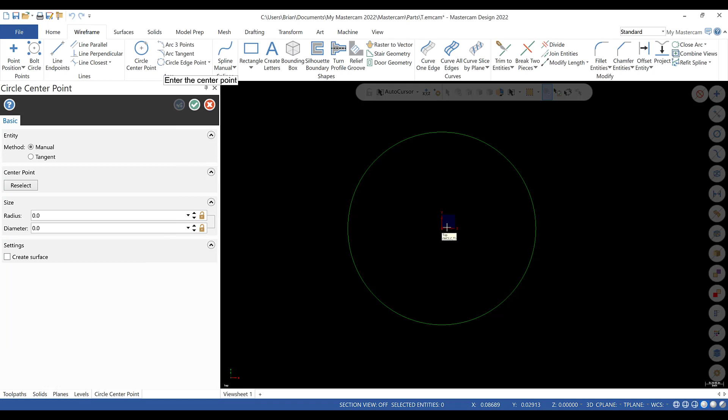All right, and there's essentially the 2D geometry we're looking at. Now it's time to go into solids and extrude this shape. This part overall is 5/8 of an inch thick, so we will change direction and change the distance to 0.625.

Okay, so looking at the drawing, next thing we'll take care of is this chamfer. Back into Mastercam, we'll do chamfer, 1 distance. It's a 1/16 chamfer, so I'm just going to pick this edge here and selection, and the distance is 0.0625. We'll hit green check. There is the basics of this model.

Okay, so for right now I'm just going to take care of the levels. This level is going to be part wireframe. Then I'm going to do a new level, and this will be model. I'll take the actual solid model and put that on level 2. All right, good time to save. I'm just going to save this on my desktop as 5-axis drilling.

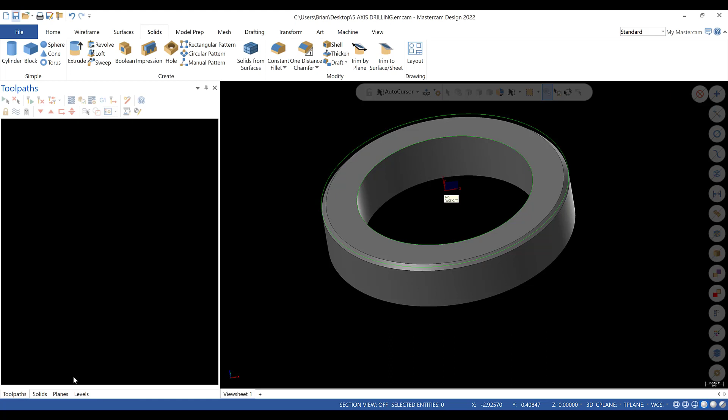All right, and what I'll do is I'll transition here, let you guys catch up, and we'll take care of these 13-degree angled holes. Okay, so let's take care of the angled holes here.

So we'll take care of a bolt hole circle at a diameter of 2 inches, 860 thousandths into wireframe, and I'm going to make sure my levels, the part wireframe, is active. I will then draw the arc, diameter of 2.86, and then hit green check.

And then what I want to do is I'm just going to draw a quick line from 0,0 out into space. The only thing I got to watch out for is that it is horizontal. It's not super fussy, but it is best. So if I go to top view here, you'll get the perpendicular icon right there, and click here.

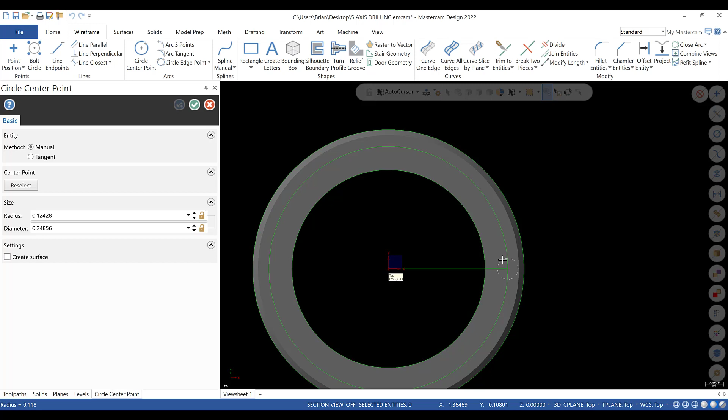And then I just hit divide to ensure that there is a nice crisp intersection where I want it. I hit circle center point, put it at the end of the line, and these are 1/8 of an inch diameter circles or holes. Then what I do is I delete this line. Now what I want to do is tip this wireframe geometry.

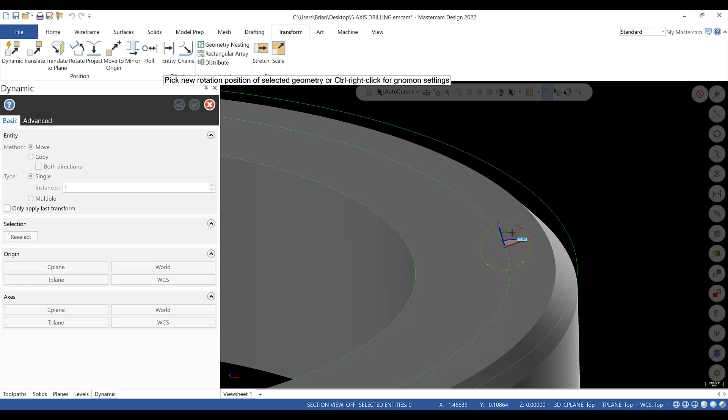So to do that, I'm going to go to transform, dynamic, select this hole, and hit end selection. Place the dynamic gnomon right in the center. About the Y, we're going to tip this -13 degrees, just like that, and we'll hit green check. So now we have a tipped piece of geometry.

All right, now I'm going to clear colors, and I'm going to rotate this arc, okay, and notice it defaulted to 3 instances, 1, 2, 3, at 90 degrees in between. That is correct, that's what we want. Copy is on, green check. Right click, clear colors, and you'll see our geometry.

Now it's time to cut the holes into the solid model. So we'll go to solids, extrude, select the 4 circles, hit green check, and we are going to end up doing a cut. We're going to go both directions to make sure it cleans up.

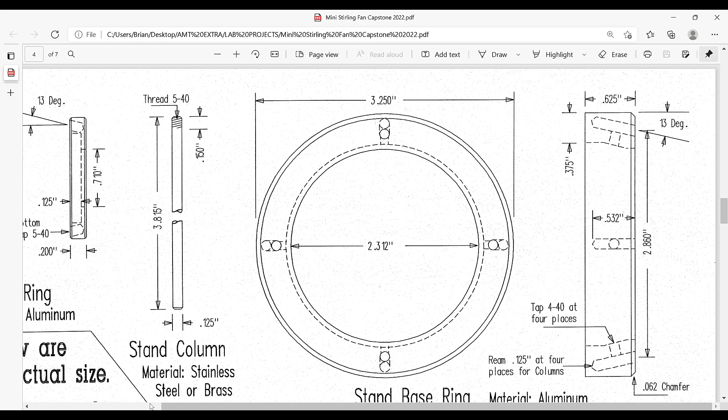And these holes, if you look at the drawing, I don't see any specs on the depth here, so we're going to go about 1/2 an inch. If we go back into Mastercam, we do a depth of 0.5, and then we go into transparent view down in the right corner of the software. We can see the holes, we'll see that we are not breaking through the edge. That should work for us without any problems.

So we'll hit green check now, and we have our angled holes. Okay, if I turn the wireframe geometry off, we'll see our workpiece. So there's the angled holes. This part, the actual workpiece, is complete.

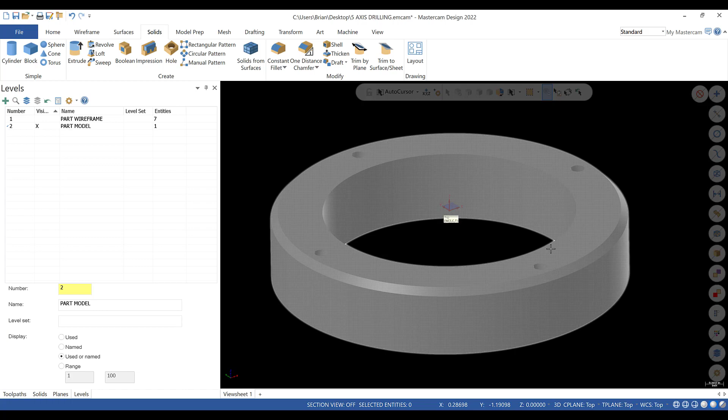I'll put a transition in here. We'll draw our stock, we'll merge in our fixturing, and then we'll start the machining process. Okay, so let's take care of our stock. If we go back into wireframe, I'm just going to turn that one off. I'll do a new level, and this will be stock, and we'll end up drawing just a circle on the top here.

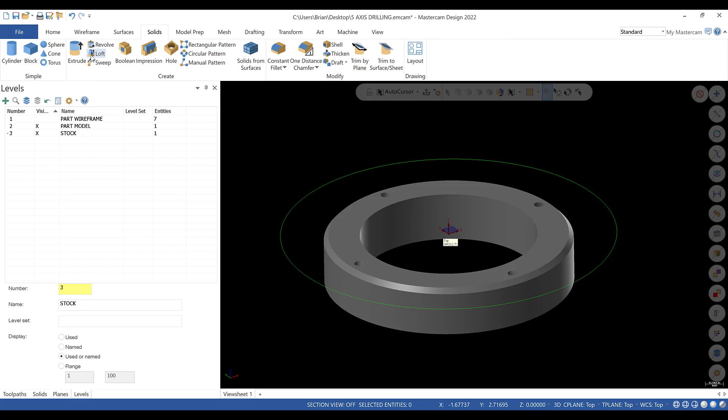And the OD, the stock we're using, is going to be 4 3/8. All right. And then we'll hit green check. And then what we'll do is we'll extrude this down. Now, this stock, we are going to be holding in a 3-jaw chuck on the UMC. The distance we're going to hang on to, the jaw step is 3/8. This workpiece is 5/8. So if we hang on to even 1/2 an inch, we'll be fine.

Make sure it's create body in one direction. So again, see how that doesn't take care of everything? We got to hang on to enough that gives us clearance away from the jaws. So even if we go 1 inch, we should be okay. But let's go 1.25. See how that looks. And then let's take a look at this in transparent. That should be enough to hang on to.

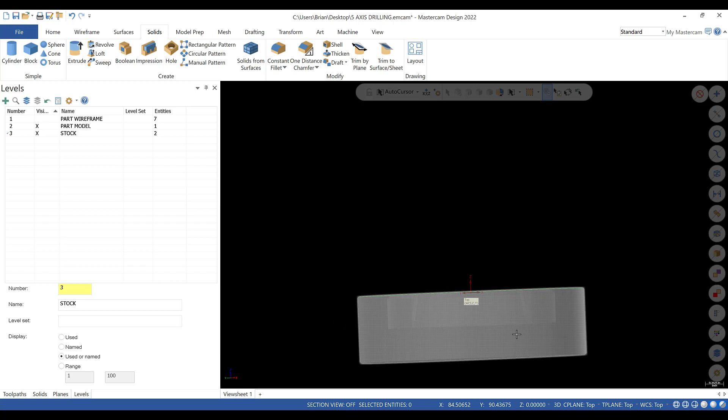Obviously we'll bring in the stock, bring in the chuck geometry. We'll merge that in right now and see how that looks. But that's what we're going to work with for now. I think that'll be fine. One thing I will do is I will highlight this, click that, and I will change the stock color to red. Okay. Good time to save.

And now what I'll do is I'll go to File, Merge. And I'm going to take a look for where I have the UMC tooling right here. There we are. Okay. So I'm going to move this somewhere here for right now. Okay. I'm just going to hit green check and clear colors and out of here.

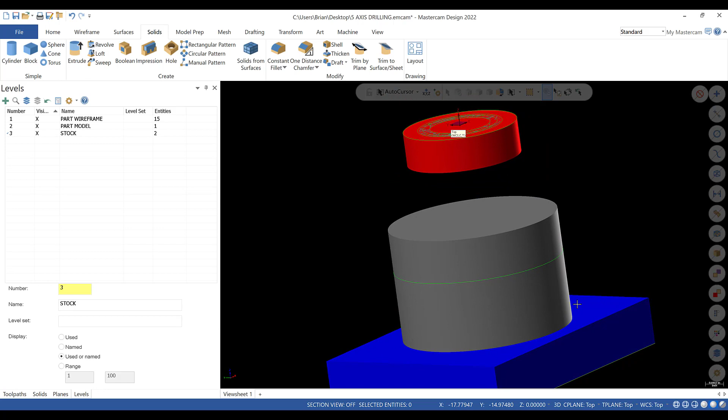So what I want to do is, this is our fixturing. Okay. This is going to be the workpiece. Now, again, I don't really draw the chuck jaws. I treat this whole thing as stay away, if that makes sense. So I know that the step I want to be on in the jaws when I flip the jaws on the UMC is roughly 3/8 deep.

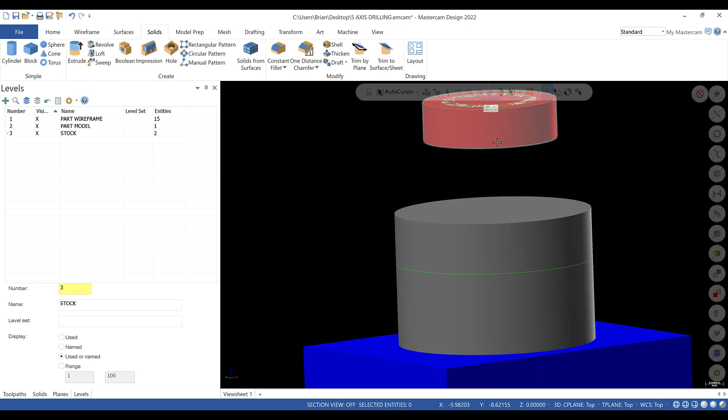So what I'm going to do is, there's a couple things here. This is the base of the chuck. Okay, we can position this down 3/8, or I can take a piece of geometry. If I go one edge only, and actually I want to make sure I'm on the right level here. This I want to move, so let's put this on a new level. This will be level 4. And this will be fixture. And make sure that level is active.

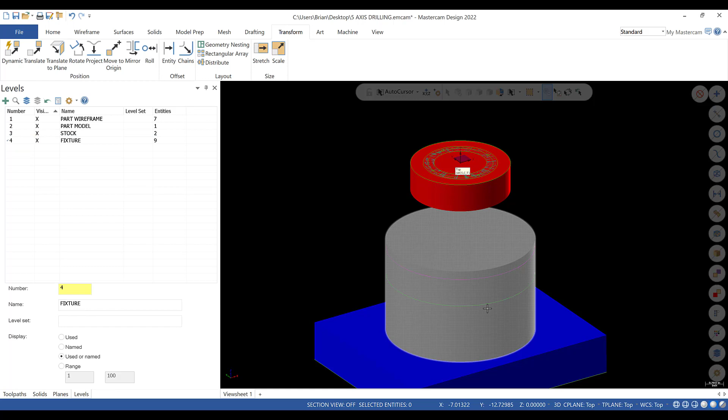And what I want to do is, I'm just going to do curve on one edge. And then I'm going to go into Transform Dynamic, select that curve, hit End Selection, center it, and bring this down minus 0.375. All right. That's good. All right, that'll help us reference this.

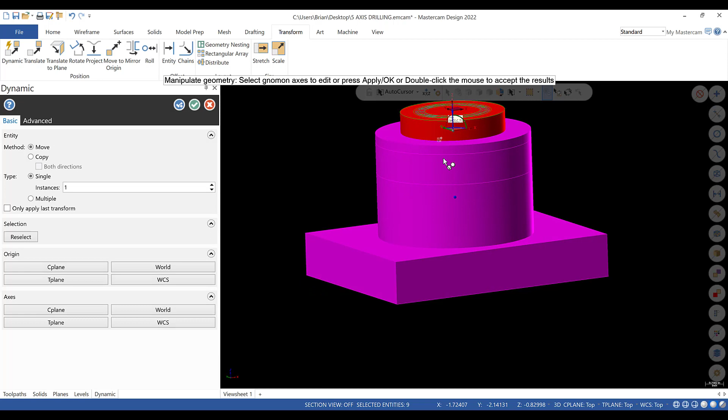Now what I want to do is, I'm going to move the fixture to the workpiece, and I'm going to go to Dynamic. You could select this arc, but I'm going to go right from the top here for right now. Bring the Z up to the bottom of this workpiece, just like that. Okay. So we know we're on the bottom. And what I usually do is, then I'll bring the Z up. Now see how it doesn't really change?

If we go to the bottom here, I just hit apply, and then reselect everything. So like, all your fixturing, hit End Selection. And I made a mistake there. You got to make sure you select everything. There's a couple options here for selection. If I just go clear colors, what I would normally do is just select everything, just being kind of careful with the window, and you should not get anything above it. It should select everything down here. And since there's no 2D geometry in the bottom of the part, we should be good to go.

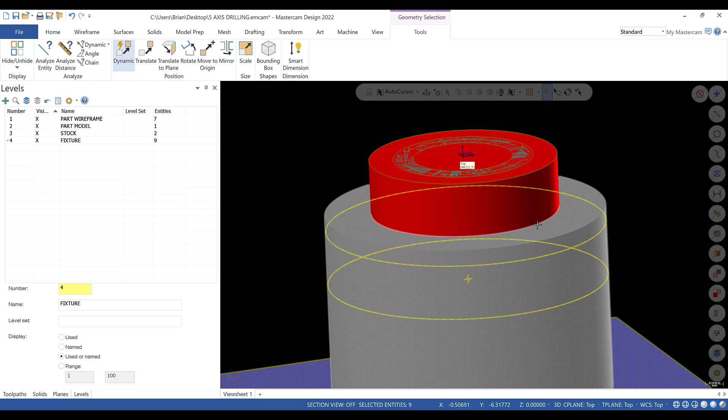Then if we go to Dynamic, select the top here, and then come up 0.375. And then hit green check. And then if we go to transparent, we should be in the front view right in line with that arc. So that'll work for us. That's a good representation of what's going on. You'll see we have plenty of room to hang on to this. Okay. That should be fine.

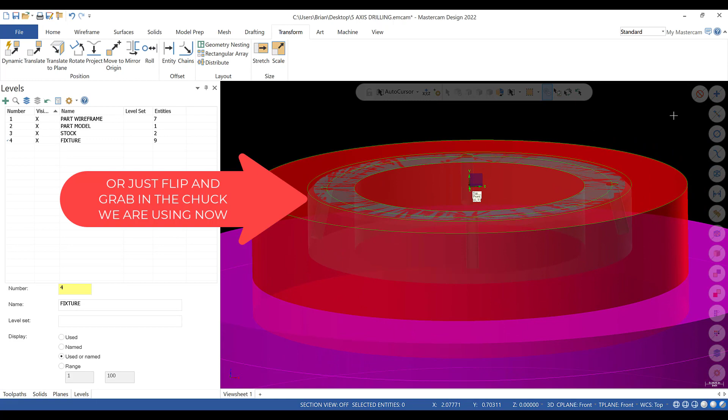The plan for this workpiece, there's a couple ways we could hang on to this to actually part it off. You can use a slitting saw. I don't think it's going to be worth it for this example. The other option is we could actually grab this in soft jaws, flip it, and mill it down. What we'll probably end up doing, just to give people more experience on the wire, is grabbing this from this side of the workpiece, maybe on the ID, or even the OD in a chuck, in a 5C indexer in the wire, and then we'll part it off that way.

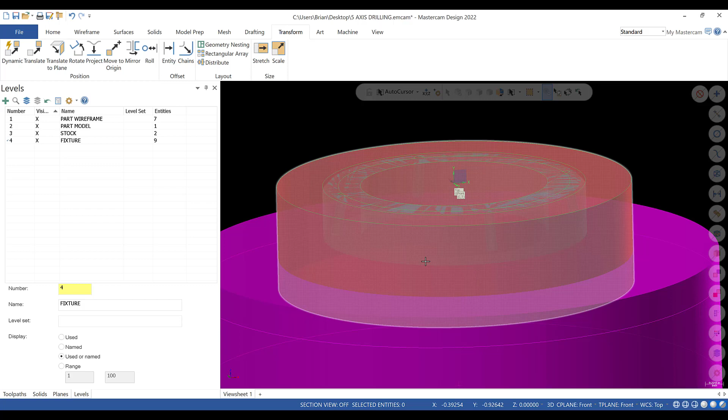That's what I'm kind of thinking we'll do there. And that's not the most efficient way. That's just to get people more experience on the wire when we get there. Plus, it runs on its own, so once this is running, you can go do something else. We only have to make 2 of these, so it's not a big deal. So we'll live with that. This is all ready to roll and position.

Good time to save. And then I gotta go back and go to planes, and I'm just gonna change these like that. Go to top view. We'll be able to use our top view for this gnomon, but I think it's easier to create a new gnomon at the top and leave the top at the bottom. I think that helps with positioning it on the machine table when getting into simulation.

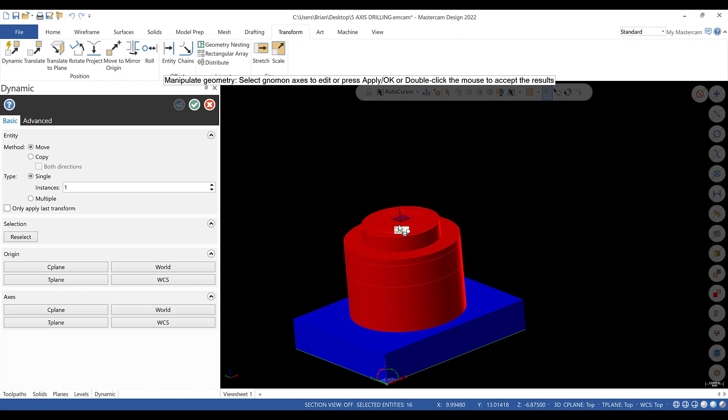So what I'm gonna end up doing is just selecting everything. And then I'm going to go to dynamic, and I'm going to select the bottom, bring it up in the Z. And see, I didn't get everything, so you got to be very careful with that. And then dynamic, select the bottom, bring it up in the Z to the gnomon. Looks good. Hit green check.

And then I'm going to do a new one. Dynamic is fine. From the center of the stock or the workpiece is fine, and this will be G54. We will make sure to manually call it 0 so it forces G54, and we'll set it as our WCS, T plane and C plane and hit green check. So there we are. Our top will be on the bottom. There it is. So now we're pretty much ready to machine this.

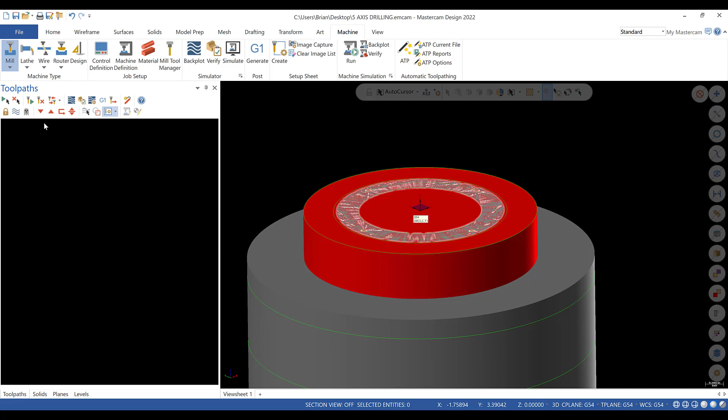I will save. I will clear colors. Okay. And I will go into toolpaths and bring up my UMC that I want to use, which is going to be the Haas UMC 750SS post right here. Okay, so good time to save and a good time to put a transition in, let you catch up, and then we'll start with the simple toolpaths, just milling this to size. We won't be doing any 5-axis work for this first operation. It's just 3-axis work.

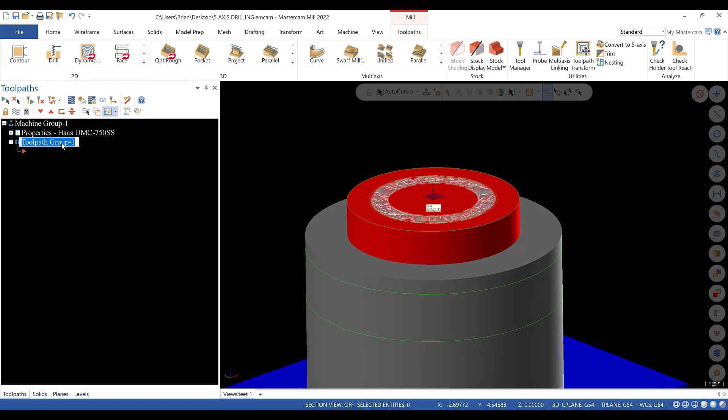Okay, so I'm going to do a stock model for this one. So this first toolpath group will be stock model. And I'll go to the stock model settings, and the initial stock shape from the stock itself. So I'll get into here, and just to be real clear with my levels, I'll turn the other options off. And select it, or just window it. Usually click 3 times or you can window it. And then end selection. And that's good.

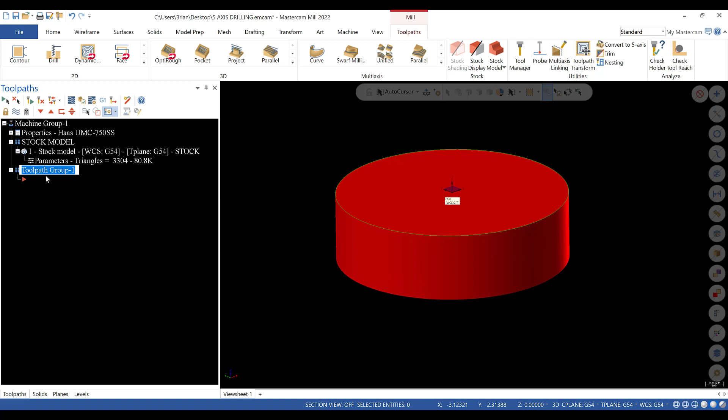There are no source operations. Everything here is fine. The color's fine. This will be stock. And the stock plane, let's go to top and hit green check. And it should look just like what we have. So that's good. So I'm going to turn that one off. And we'll do a new toolpath group now. And this will be operation 1. And let's take care of roughing this out.

So I'm going to turn the fixture back on and the part model on for this. We could use this 2D geometry if we want to. So in toolpaths, let's do a dynamic toolpath. And the machining region is going to be here. And we're going to go from outside, and the avoidance region is going to be this outside. And hit green check. I'm going to preview the chains. Looks good. Okay. One thing I will do is go transparent.

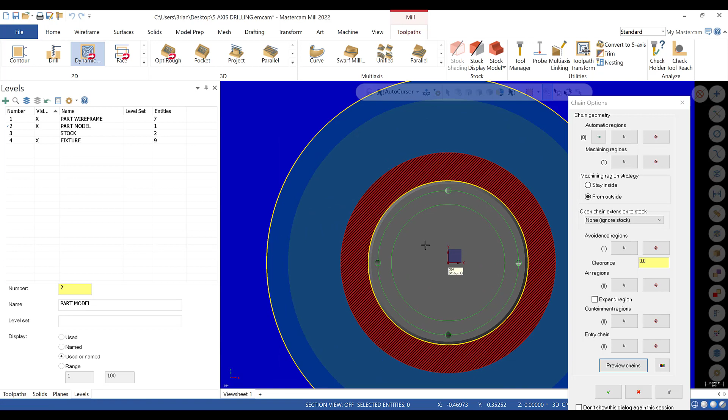And actually what I'll do here also is go to levels. And I want to turn the stock off just to make sure that lines up. And we are seeing the chamfer, but I just want to go to top view now and double check that. Looks good. So we'll hit green check. And the tool we'll use can be a 1/2-inch end mill. So go to here, go to the filter, and we'll just select a 1/2-inch end mill. That's fine. This will be tool 1 for us.

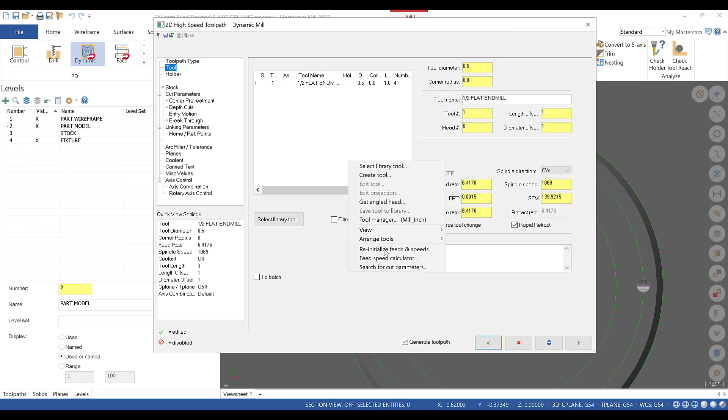This tool, I'll double check the settings here, finalize properties. This will be a carbide cutter. We'll hit finish, reinitialize the speeds and feeds. One thing I need to double check here, I'll just green check that out. Get into properties and go into tool settings, and I'm going to go from material, and this material is going to be 6061 aluminum from the mill library. That's fine. If we edit this, again, it's on the slow side, like I say in every one of my videos, but we're okay for right now. We'll hit green check. That'll get us in the ballpark.

Go to parameters again, reinitialize. This should update. That's still super slow. I'm going to turn RCTF on for this. I'm going to end up going to a surface footage of around 800. And then a chip load of this cutter of 0.003. And that's still conservative, but that's in the right direction of what we want to do. This will be roughing OD.

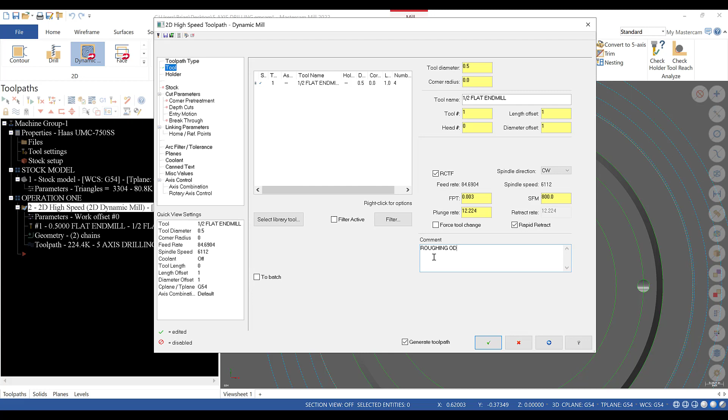And the holder I'm not worried about for this op, so we'll ignore that. The cut parameters, we'll go to a step over. 25% is fine. We'll leave 5,000 on the walls and nothing on the floors. The back feed rate will be 500. Everything else there is probably okay. No depth of cuts. Entry motion is going to be plunge only.

Linking parameters. Now, I want to be incremental for all of this. And the clearance be 2.0. Everything else is okay. The depth, this should be 5/8. But I'm going to go a little deeper than that into the stock. We should be able to stay away. Again, remember the stock is hanging up a little bit. So let's go like 750. And I'm going to regenerate that. And again, we are still above, but we're not hitting the jaw, so that'll work out.

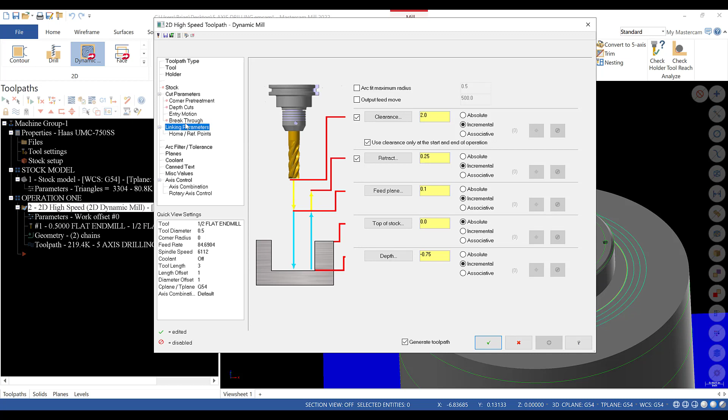Let's see what else we have here for some settings. The arc filtering, I'll turn the line arc filtering on. I'll change the tolerance to 3,000ths and split it. That's good there with apply. Planes are fine. Coolant will be on. What else we have here? Should be good. 25% should be fine at those speeds and feeds. That should be okay. Again, this is slow.

Usually when I'm dynamic milling aluminum, I'm around 12,000 RPM. The feed rate's usually in the 125, 150 inches per minute range. But again, for learning, I like to keep this on the reduced side, just in case you make a programming error. But everything else should be okay, so we'll hit green check. And I'm going to end up putting the stock model on here just to see this. And we can run this now. And we can see what we have going on.

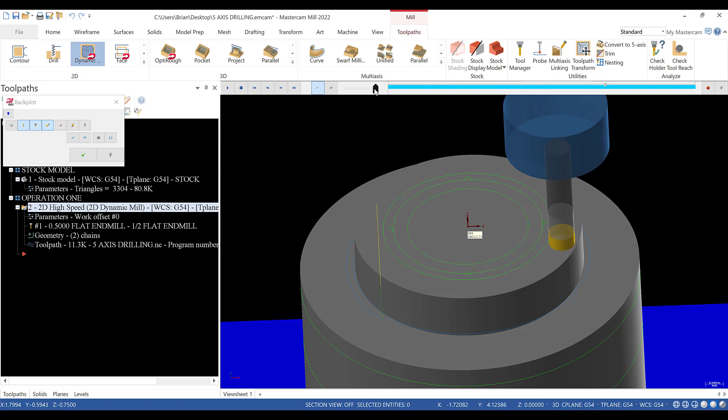Okay, pretty clean to rough that out. Actually we'll rename this now, roughing OD. Okay, and I'll separate this a little bit. So we're good with that one. Let's do a new one. So let's just copy and paste here. And this operation here will be roughing the ID. And we need to change some things in this. One of the big ones you got to change is make sure we helix in. But let's change our chaining dialogues here. The machining region, we'll get rid of the avoidance. The machining region is going to be this ID. That's all we need there. This is stay inside, and preview chains.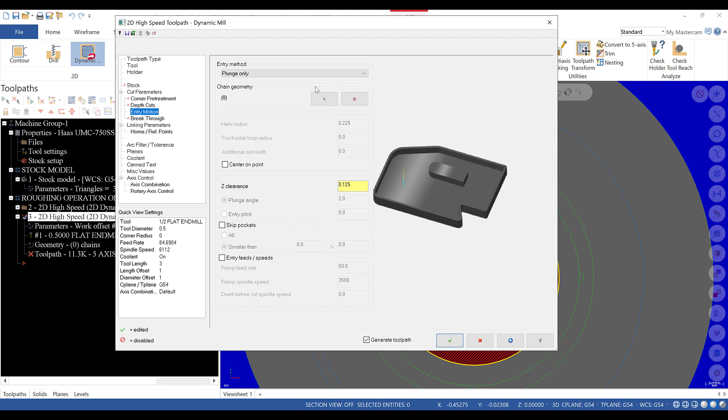We go to top view. Looks good. So the tool is fine. All the speeds and feeds are okay. The cut parameters should be okay. Entry motion will go to helix only. Linking parameters is going to be the same. Arc filtering, make sure output 3D arc entry motion is on. That'll help smooth it up. Planes, everything else is okay. We'll hit green check. Okay, let's turn our stock model off here quickly. We'll see our toolpath looks good.

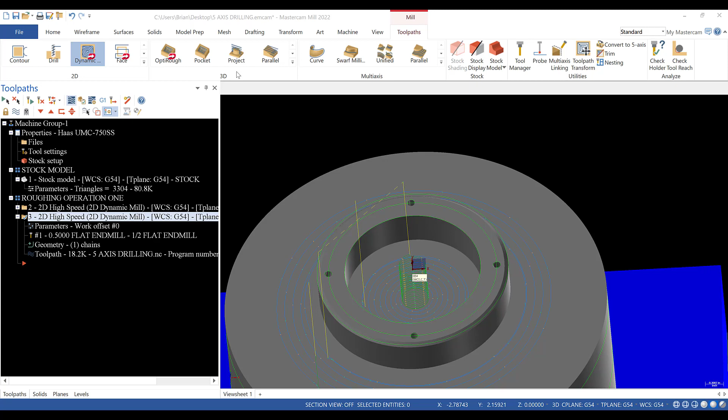Okay, so if we go to backplot and only backplot that operation we just created, we'll helix in and rip around. Okay, now you can tweak the helix settings. Let's say you want to slow down to helix in. Entry speeds and feeds, you can reduce this. So, that's up to you. I think you'll be okay. Again, we are not running that fast.

So if you do run into some chatter issues, instead of changing it up there, especially in like stainless or something, I will use these, and I usually reduce like 50%. Let it work its way in. I'll put a little dwell on depending on how quickly the spindle needs to spool up to make sure the spindle's at full RPM before it starts moving. But that's optional. I think you'll be okay. The plunge angle at 2 degrees is probably okay, but we'll change to 1 just to be safe. Z clearance 1/8 of an inch is fine. Everything else is okay, so we'll hit green check, and we'll consider that done. Okay. And good time to save.

So after this, I'll transition now. We'll take care of our finishing. So right now, I'll just reinitialize our stock model while we're at it. I'll right click, new toolpath group, and this will be finishing operation 1. Okay. And one thing I did forget, I will put a facing operation in. You don't need to see that. I'll probably do that first. I'll put it right here. I'll do a quick facing operation just to face to 0.

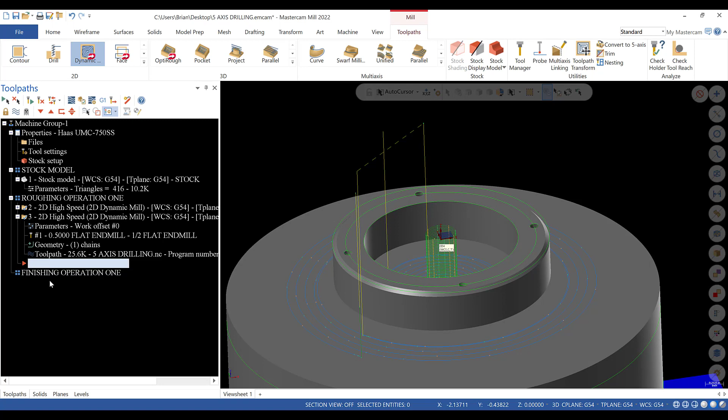And that's not a big deal. You should be able to do that by now. So I'll put a face to 0 in here. I'll come back. We'll do the contour toolpath together, and then we'll take care of the 5-axis work on this workpiece. We'll chamfer it last. We'll do a model chamfer on the inside, and that'll be it for this video.

I'll take care of the parting off. You should be able to do it. Again, I'll leave that up to you how you want to do that. So I'm sure by now you'll be able to program that. So I'll transition here, and we'll continue.

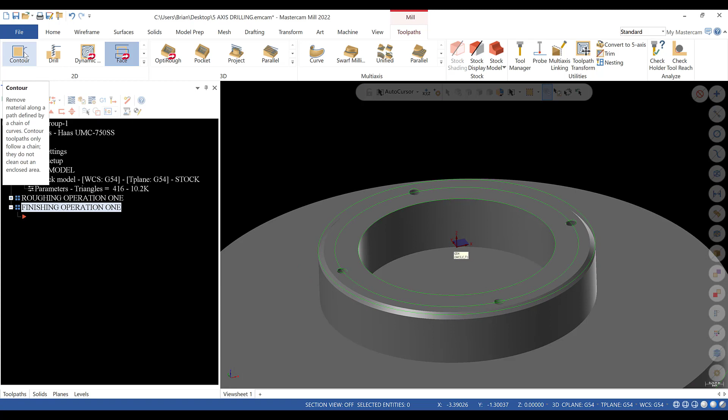All right, you can see I added the facing operation here quickly. So we're done with the roughing for now. What I need to do is get into some finish operations. So I am going to get into my planes, and I'm going to end up turning levels, and turn my stock off. I just want to be able to comp these sides and get a nice finish on them. So go to contour, and I'm going to select the outside.

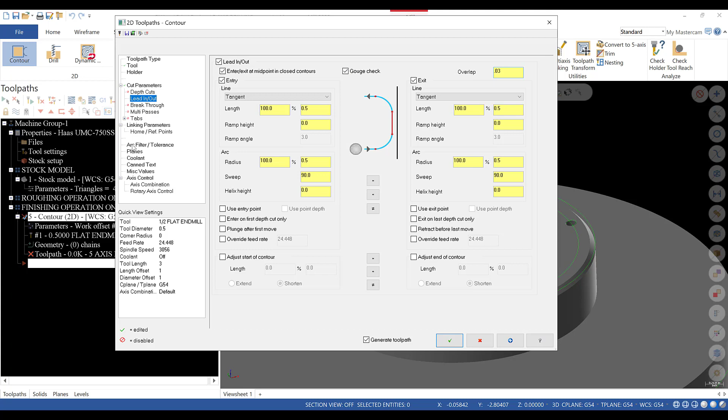And tool, we'll use the same tool, I'm not worried about it. Surface footage, feed rate's fine. Comment, finish OD. Cut parameters, wear compensation, no depth of cuts, lead in, lead out. We will make sure there's an overlap of like 30 thousandths. Linking parameters, the depth will be down there, and actually it's going to be minus 750. Everything else incremental. Make sure you put the clearance on and hit green check. And there's our finish pass.

We'll copy and paste this, and then what we'll do is we'll update the chain. So we'll rechain all. We'll select this chain and hit green check. And we generate the op, and that should work out just fine for us. I will rename this finish ID. Okay. So that's good.

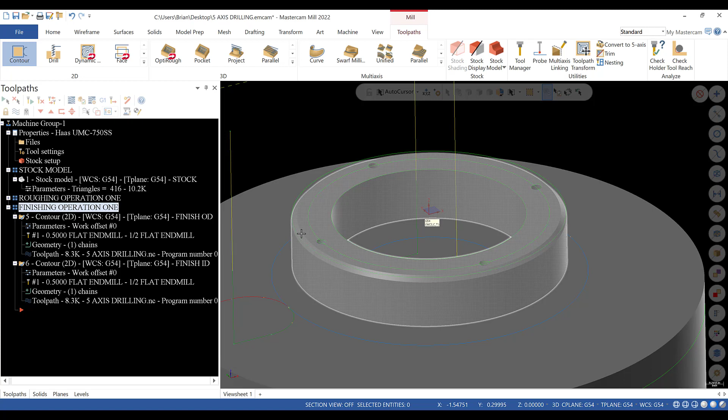And now it's probably not a bad time. I know I said I'd do the chamfers last. Let's just get it out of the way now. This one is a 16th chamfer, and I do have 1/8 inch chamfer mills in the shop. So we'll use that cutter. It may not be a full 16th because I don't want it to gouge, but that's what we're going to use. This is just for cosmetics, so we'll put it in there. Let's right click and do groups, new toolpath group, and this will be chamfer / deburr.

Okay. All right, let's take care of this chamfer toolpath. It's not a model chamfer, but we'll take this upper contour, right click, copy, and paste it because the chain geometry is going to be very similar. I'm going to get back into here. I should have a tool loaded, but if not, it's just going to be whatever tool you created, your 1/8 inch mill drill. I know it's not going to be able to create the 16th chamfer, but that's the chamfer tool we're going to use because I know I have a lot of them in the shop. So we'll leave that there.

Speeds and feeds are okay. We might have to reduce that a little bit. Surface footage is going to be like 800. And we'll reduce that because the machines don't have that. So let's go maybe 500. No, still not. Let's see here. Yeah, that'll work. I didn't reinitialize. That's my fault. And we'll do a thou chip load. That'll be good for this small cutter.

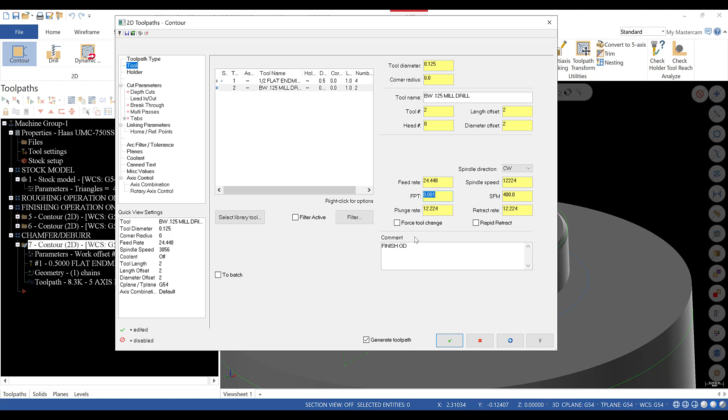So we'll hit apply. In the cut parameters, wear is fine, but we're going to go to a 2D chamfer. The chamfer width we're going to select is 40 thousandths. The bottom offset will be roughly 10 thousandths. Okay, and that'll give us a decent chamfer. We can even go like 45. It should be okay. Lead in and lead out's fine.

Linking parameters, the depth we need to change. That really needs to be incremental. So if we just go there, it should be fine. Everything else should be okay. We'll hit green check and take a look at what we got.

So this is not going to actually touch the workpiece. So even in backplot, if we single block through this, you'll see that we are away here, which is fine, but we are doing much less of a chamfer. But that's okay because I'm not really worried about it. I just want to make sure that we actually have chamfer mills available. So that's good for this one.

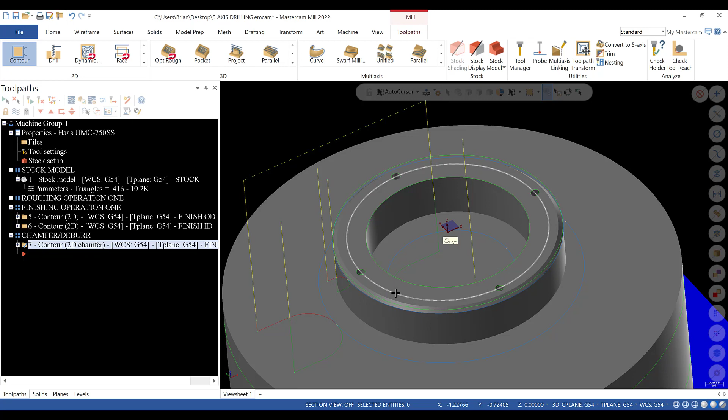The next one we need to do is model chamfer, and that's just going to deburr this inside. Okay, so to do that, we'll go into here and we'll go to model chamfer. I'm going to check this chain here, and the tool will be our mill drill. We're taking a very light cut on this, so that is going to be okay. I will cut the feed down, but that'll be okay.

Cut parameters, we'll do computer comp, that's fine. The chamfer width would be like 15 thousandths. The bottom offset will still be 10. Depth of cuts, no. Lead in, lead out, I do want to overlap a little bit.

Everything else is okay. Clearance will go 2.0. So we should be in good shape. We'll hit green check. And there's our model chamfer. All right, so it's a good time to save. And that's the end of Operation 1.

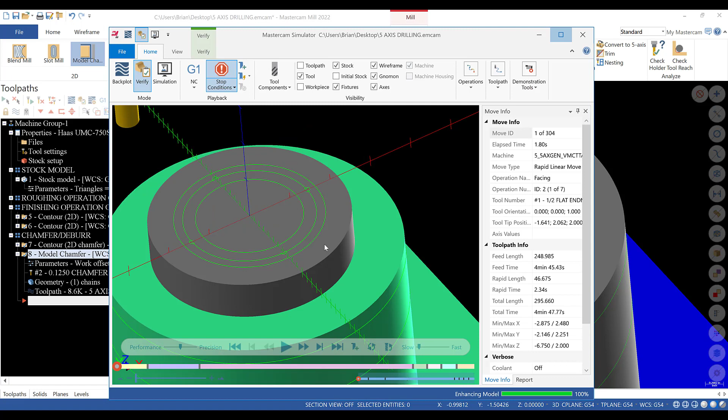So go into your simulator settings, make sure everything's set up. And then I'm going to select everything and go into verify. And let's watch this run. I got the performance precision kind of in the middle. Slowed it right down. You'll see the facing operation. And we'll take care of the OD.

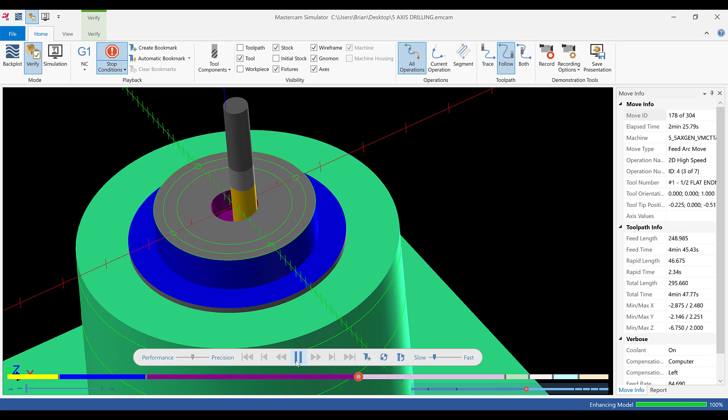Take care of the ID. And we'll finish everything up. And then we'll take care of our outside chamfer. Looks okay. Take care of the slight inside chamfer for deburring purposes. Looks good. That's the end of the operation. Again, good time to save.

All right. And we'll put a transition here. I'll just do right click right now, do a new toolpath group. And this will be holes 5x. Okay. So I'll turn these operations off. We'll go into hole 5x and we'll take care of drilling these 4 holes, tilting the B and C around. Okay, so let's drill these holes.

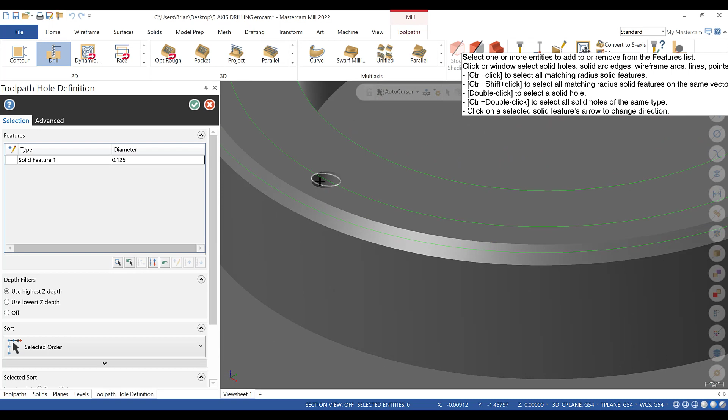We'll go to drill. And I'm going to select the surfaces of the holes. That is very important because that gives you the vector direction, which will help align the B and C axes for this toolpath. So make sure you select the surfaces. And then hit green check. Now, we're going to spot face this, spot drill it, and ream it. Just for some practice. So we'll go to tool.

We'll select an 1/8 inch tool. Speeds and feeds are fine for this. This will be spot drill. Okay. And no holder information is necessary to me for this operation because we're not tipping that much. Again, I'll leave it up to you what holder you pick. If you're worried about collisions, then you should put a holder in, but I'm not worried about it for this one. So we'll go to spot drills, fine.

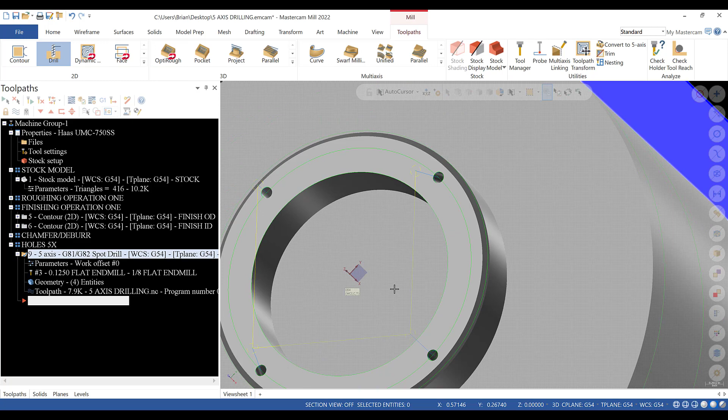Tool axis control is where it starts changing. This will be 5-axis. No hole segments, linking parameters. We need to update this a little bit. I'm going to put calculate depth from top of line hole. The depth will be minus 0.015. No tip comp on. Everything else is okay. We'll talk about safety zone in a minute. So we'll hit green check. And hopefully the tool is not going that deep. It is not. It looks good. So you see that they are tipped.

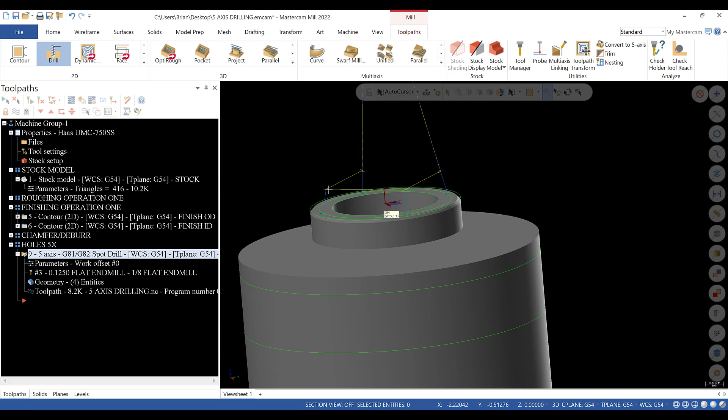Okay. Now, we have an issue here in the fact that we need to put in linking parameters our clearance of, let's say, 2 inches and hit green check. And that helps, but still rotation is occurring with the tool right here. That is probably okay for this low angle, but I want to show you how to get it like a safe zone. So we'll go to safety zone, turn it on, and we'll define the shape by using our workpiece and selection. We'll just go to cylindrical now. We didn't have to select the workpiece. That just helps center it.

We'll go to Z. And what I want to do is I'm going to increase this to something that looks okay. So that's a pretty decent clearance. So we'll go right around here. And then I'm going to offset up the zone to something like that. So this will give us a clearance zone that the tool can't go between rotations. So we'll hit green check and then hit green check again. And you'll see what happens. The rotations happen up here. So when we watch this run, it drills, goes up, moves.

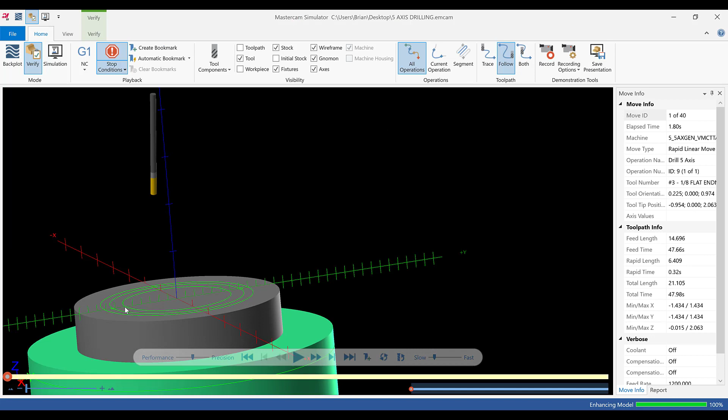Now, that's not a great representation. What we really should do is go just into verify quickly. And if you watch this run in simulation, I know the tool's up in the air. I know I got to pick a different machine, but let's just watch this for right now. So it drills, goes up, then rotates. Okay? And that's the whole point of the safety zone.

I don't think we need tool holder information, I'm not worried about it for this one. And that's the name of the game there.

Before I get back in there, I'll update my simulation settings to the Haas UMC 750. I'm not worried about the transform here. Let's verify that again in Simulate and see if it's positioned correctly. It's not, it's probably 2 inches up in the air, so I'll change that in a minute.

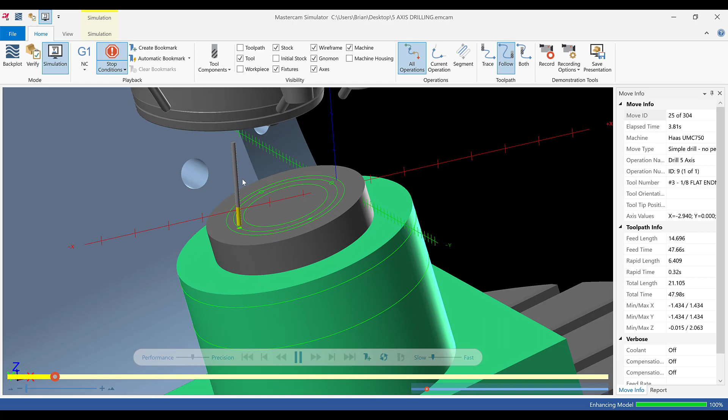We can watch this run and you'll see what I'm talking about, up in the air. You want that away during B and C movements. Is it really critical? Yes and no, but I think it'll give you more confidence at the machine. This is not a steep angle, so you could get away with it, but let's just leave it there for now.

All right, good time to save. We're going to be copy and pasting this operation a lot. The only thing that's going to be changing is the depths. So let's copy and paste this.

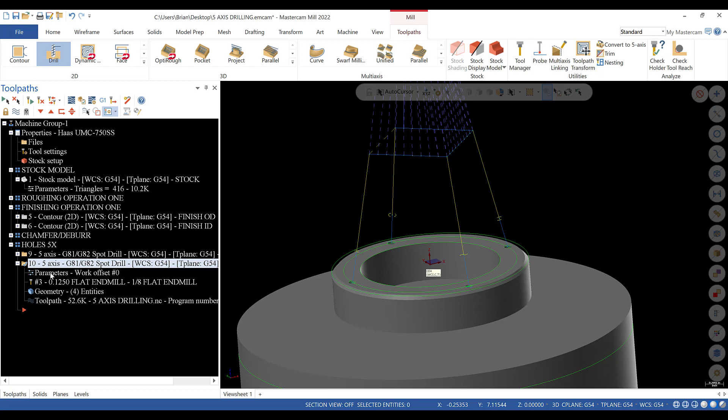Now what we're going to end up doing is taking care of the parameters, tool. Let's go to select library tool, and let's go to filter. And I'm going to go to a spot drill.

Let's say 1/8 of an inch diameter is probably okay. We got to see what we have in the shop. You might end up having to use a center drill for this, just keep that in mind. We'll just use an 1/8 inch spot drill. I'm pretty sure you could go to center drills.

Let's see where we're at in here. If it doesn't come up, it's not a big deal. I forget in here if there are center drills. Right there, radius mill, I lied to you. Nope, so we'll use a spot drill, 1/8 of an inch.

Even if you use, I forget what the number center drill would have, an 1/8 inch shank, that would be equivalent. Because again, you're not going down to the 60 degree included, you're just using the 118 at the tip of the center drill. So just hit green check, and it depends on what's in the shop.

Hit green check. Where to go? That's my fault, I got too random clicking here. There it is, this will be tool 4 for us. Speeds and feeds are okay.

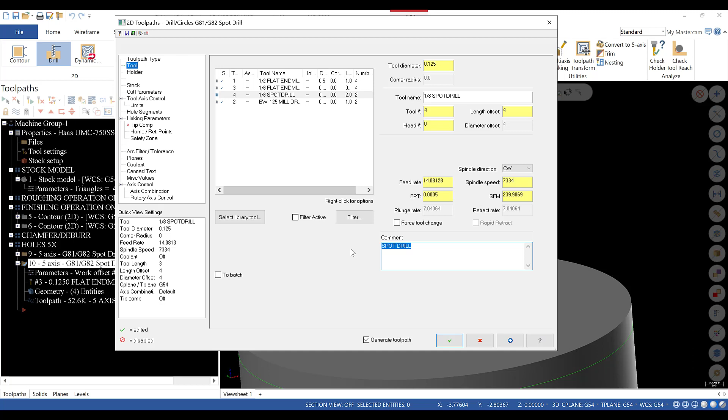This is a drilling operation. That's fine for us. This will be, so the spot drill, yeah, spot drill's fine. I do have to double check, I forget what I named the first one here, but this will work for us.

Cut parameters, this is spot drill again. Tool axis control, 5-axis, everything's gonna be the same except for the linking parameters. It went 30 for the depth. We'll go 40 for this one and hit green check.

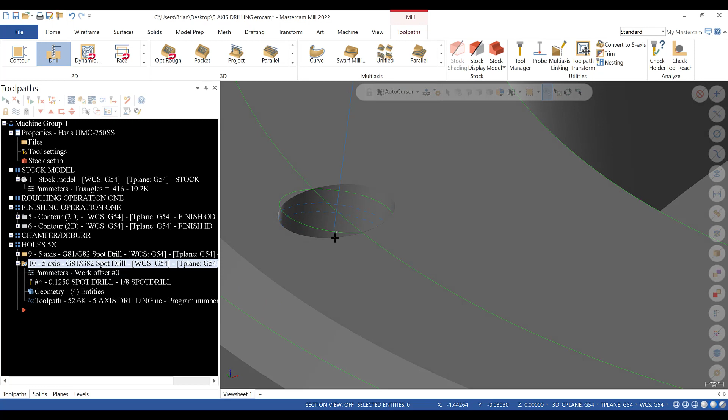Okay, so let's look at this one. That should be okay. So let's look at these two operations in verify. I'm not going to worry about the simulation for now, I just want to see what goes on here.

There's the spot face. And there's the center drill. That's okay, we could go a little bit deeper. That's up to you, it depends on what tool you're going to be using at the machine.

So that's enough for right now. We could tweak that later depending on what we have. So even 45, 50 thousandths, you can calculate it, even in here, the tip of the tool.

In our case, we will need to update this. So I will do that now just to make it look more realistic. The spot drill angle is going to be 118. Let's go to finish.

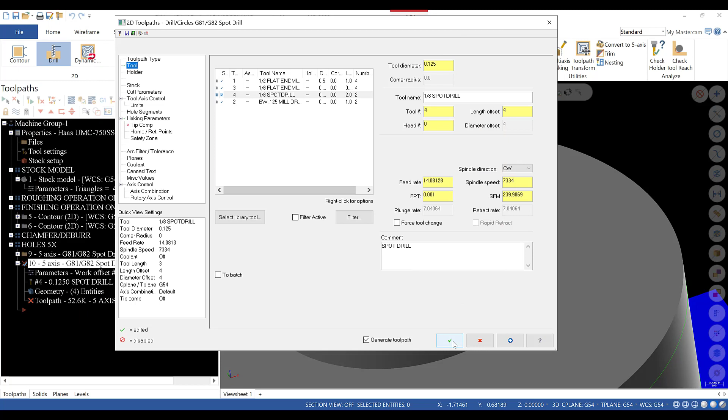If we go into linking parameters, we'll end up going, the finished diameter on this tool will be like 0.09, let's say. Tip on the flat will be 0. We'll overwrite it, hit green check.

And see how it went 27? That is probably not going to work out for us. We'll green check it because it was 30 before. So even if we run both of these, you'll see what happens. It's not going to be the correct depth because it's not calculating it given that spot drill, sorry, the spot face.

See? So again, into here, the depth is here. That was because we overrode it. If we get back into here and go minus, I think it was 30 thousandths. Let me double check this first operation.

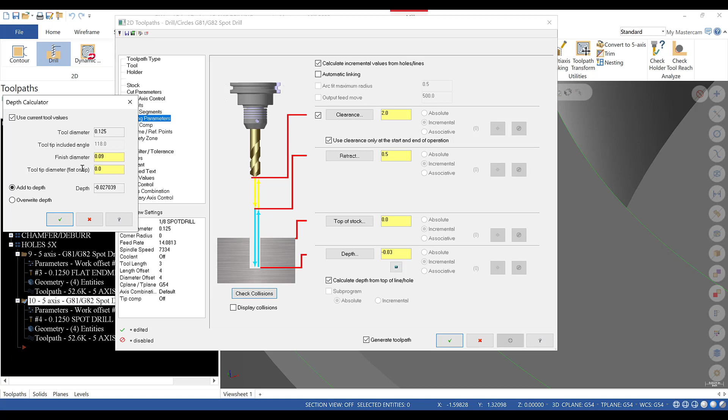Yep, so we get back into here, we're already at 30 thousandths. If we need to create a finish diameter of 90, we're going to add to depth. So hit green check, there it is. Now if we select both of these, verify. Hopefully it's not going too deep. So we'll hit play.

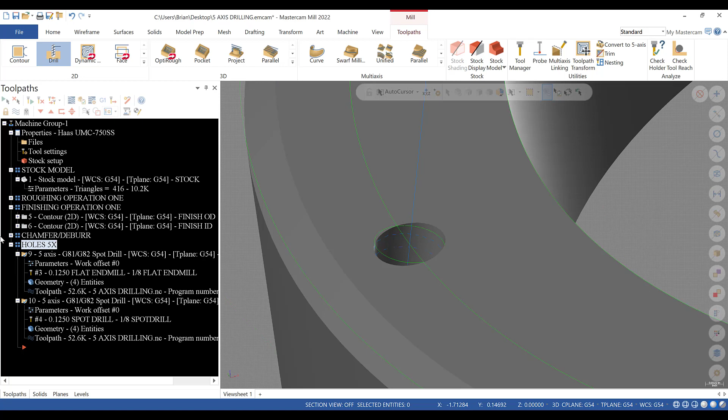Hit play again, and that looks perfect. So there's an instance where to use add instead of overwrite. So what we can do now is right click and go to paste, do it again.

We'll go to parameters, go to tool, select library tool, and now we're gonna look for the drill. Let's go a little bit under. Let me look at a tap drill chart here. We'll go to a number 32 drill, or 116 thousandths, which should be good. So we'll set it equal to 0.116, and it will be a drill. We'll hit green check, and there it is.

So we're good there. Speeds and feeds will probably be okay, I'm not worried about that. This will be tool 5. These are fine for this drill. Again, it's high-speed steel, it is reduced for drilling. We'll be okay.

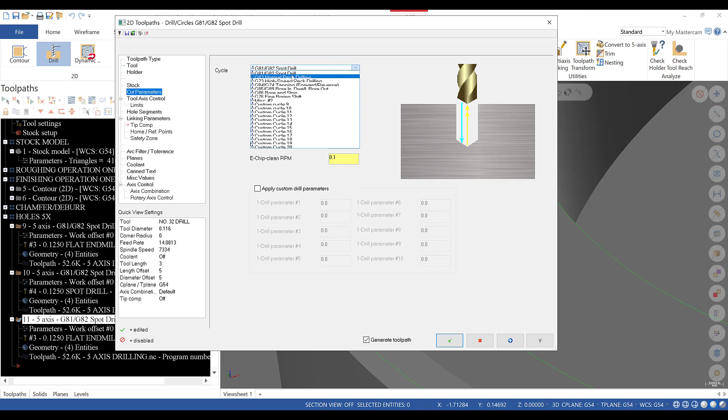Getting to cut parameters, this will have to be peck drilling. So G83 normal peck drill. This is fine for now. 100,000, let's change that to 50.

Everything else is going to be okay except for linking parameters, where now the depth is going to be right to the bottom of the hole. So right around, if you select carefully, it will highlight right there, so that works. Negative 0.5, so we'll call it negative 0.5 as the bottom of the hole, except we will not turn tip comp on. That's as far as that drill will go.

So we'll make sure that our reamer goes something like 450. Everything else is okay. We'll hit green check, that's good.

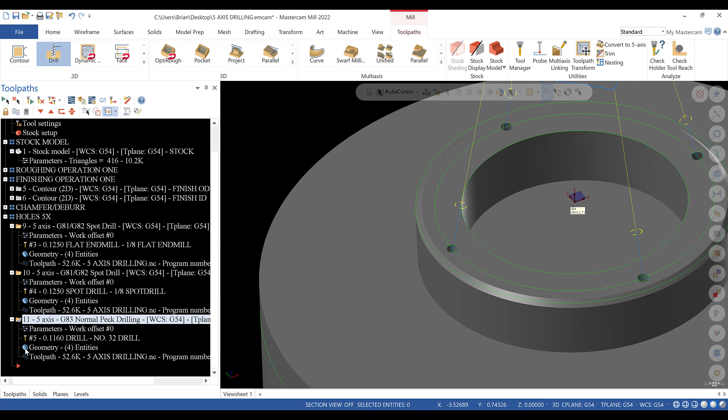Now we can copy and paste again, and we'll go to parameters, and we'll go to tool, select library tool, filter. We could add a drill, and we'll go to reamers, if I can remember where that is, right there, next to it. 0.125, green check, 1/8 inch reamer. And this will be tool 6.

Speeds and feeds are really going to be okay. I will reduce the spindle speed for the reamer, cut that to like 100. That's fine. Usually people will increase the feed per tooth for this, but I don't think it's going to make a difference for us. This is not a real critical fit, we're probably going to end up pressing drill rod in there, so we'll leave that for now. I think that'll be okay for us. If it does chatter, we'll have to address that, but it shouldn't be an issue.

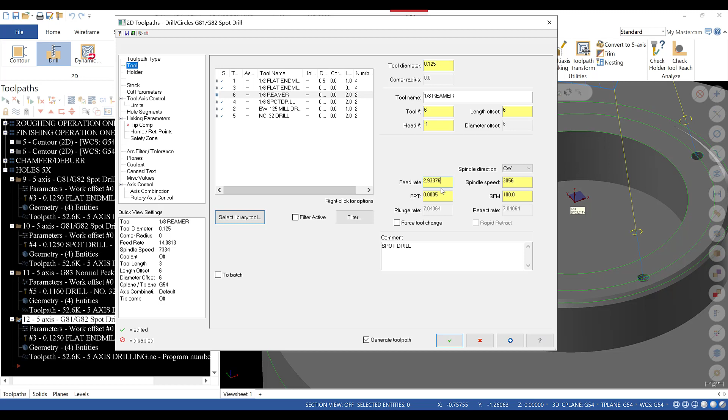A lot of people run reamers at 25% of the surface footage, but some people will increase the feed rate, and then depending on preference, some people will feed in and feed out, some will feed in but not feed out. We're going to feed in and feed out. It's not a super critical fit. This is what we're going to run for this one.

Cut parameters, there's different options here. I'm just going to use a G81 to do that, in and out of there. Linking parameters, here's going to be the same, except the depth will be minus 0.450. That'll keep us 50 thou away, shouldn't have an issue there. All right, tip comp we're not going to leave on.

Everything else is okay, and again what you want to do with the reamer is user preference. We're just going to feed in, feed out, that should be fine for this one. I'm not going to go crazy with anything else. Some people do run boring cycles, not necessarily like boring bar cycles, but there are cycles people use for the reamer. We're just going to use G81, I think we'll be fine with that. All right, so green check.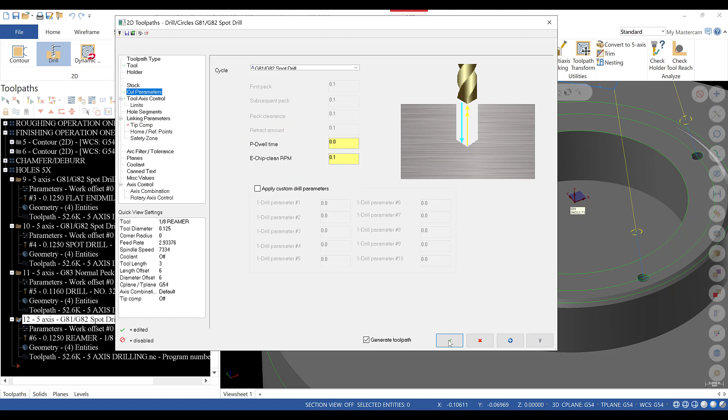And there's our reamer op. So let's look at all of these run. We'll spot it, drill it. Now see, now it's starting to drill up in space.

So let's actually look at this one. Notice where it's feeding, and take a look at this. You'll see the rapiding's okay, it's the blue we got to watch. Now that's probably okay, I mean, we're not really, it is not super efficient. That's going to come into our linking parameters and into the retracts.

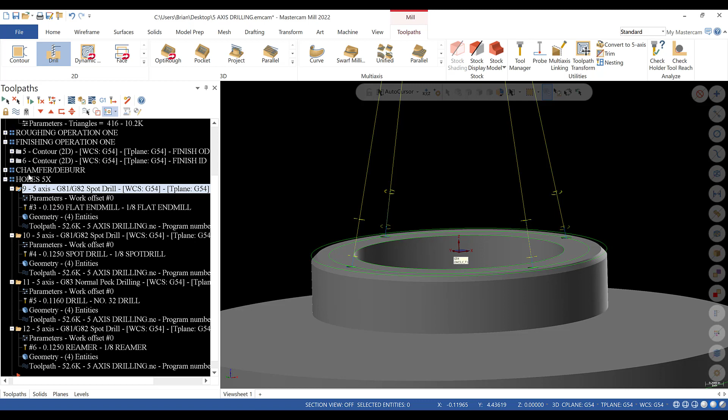So if we just look at this one, if we go to 0.1, right, and we look at this one retract and hit green check, and then we'll turn all of these off and only turn this one back on, you'll see the difference. So let's change all of these, okay? If you go right here, right click, and go to edit selected operations, and we're gonna go to edit common parameters, and we're gonna change the retract to 0.1, and we'll use enable for change.

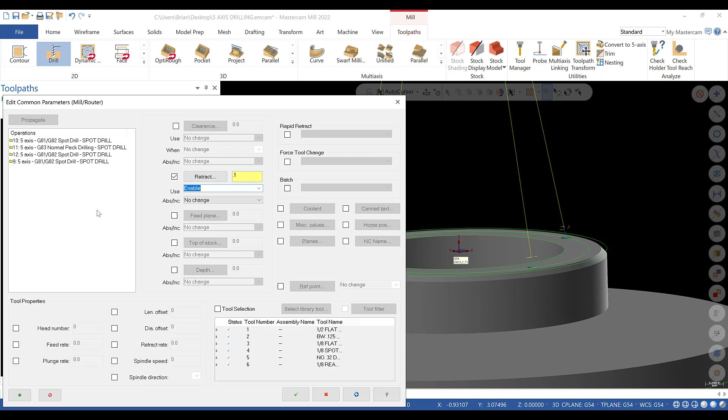Okay, so that should work. That's only gonna change the drilling operations. Let's hit apply and green check, and then we'll regenerate all the operations as they're dirty operations now. You'll see they all changed. We'll go back into here, 0.1. We'll go into the bottom one, 0.1. So that'll save us some time.

All right, the clearance is up here as part of the safety parameter, so we'll leave that alone. We'll check all these, give into here, and verify these operations. Slow it down a little bit. Okay.

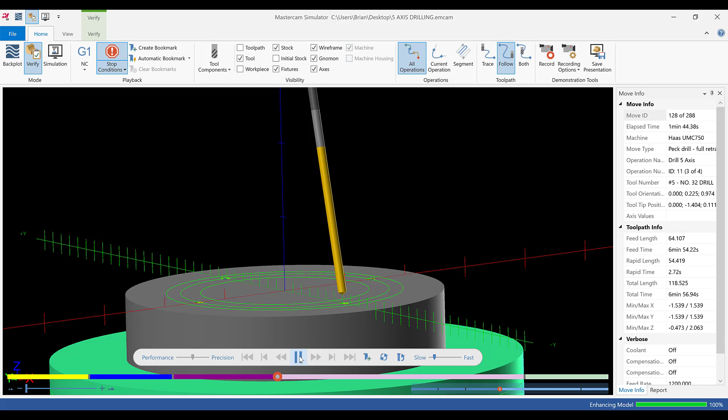There we go. And then the reamer. Okay, hopefully we have a little gap in the bottom there. We do. That should work fine for us.

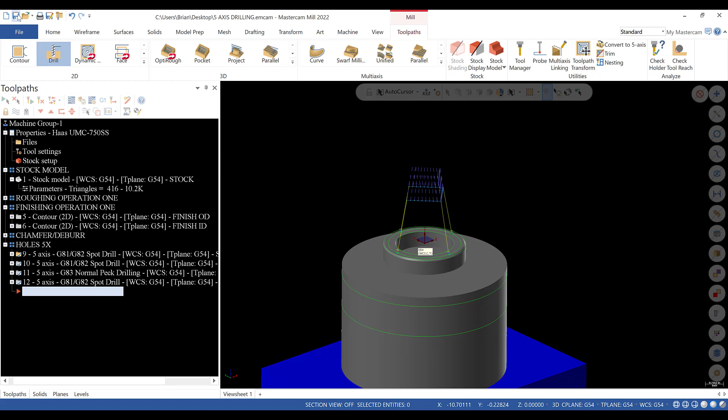Okay, so we'll hit save here. And what we'll do, I'll put a transition here, let you catch up, and then we'll take care of looking at the code and make sure everything looks okay before I say it's ready to run. So I'm going to take a look at these operations here, just the 5-axis hole ops, and post these only. Let's take a look at what we got here.

Okay, so we have our initial position, and then it gets into load up tool 3, which is our 1/8 inch flat end mill. Then it turns the spindle on, goes to B 13 degrees, locks the table, dynamic work offsets. There's tool comp. There's our Z minus number, R value, proper feed rate.

Goes up to dynamic work offset off. G234 is tool center point control. That is used for simultaneous movement, very similar. So basically, you have dynamic work offset and tool center point control, and they help with the ability to use the same program at multiple spots on the machine tool.

So the reason, you don't have to sync up the program to the rotary zero point on the 5-axis machine anymore with these codes. 254, 255 is dynamic work offset on and off. That's for 3+2 machining. 234 TCPC is for the simultaneous movements, but gives you the equivalent type of abilities, if that makes sense. So what this is doing is it's rotating about the work offset, or it's rotating about using multiple axes at once. You'll see down here you have C and B, then you'll have X, Y, C, and B at the same time, and these are feeding at 500 in 3-degree increments, and there's a reason for that.

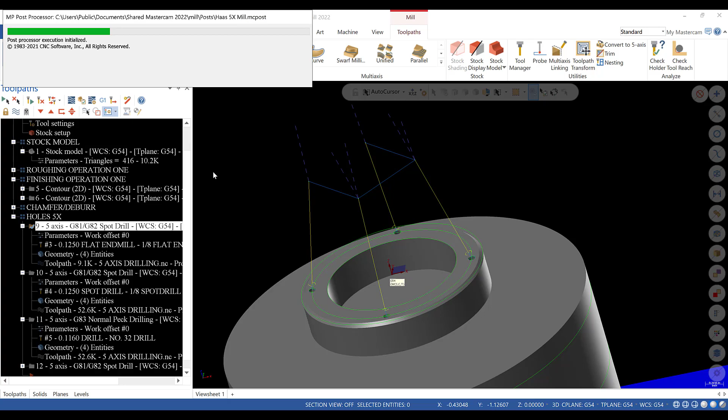Let's put our angle step to 90 just on the first operation. We'll hit green check. Okay, and I'm just going to post this one op. So I'll hit G1 and a no, and then this will be 5-axis drilling. I'm just going to go -1, hit save, and let's look at this. Both of them will pop up in here. Here's -1. You'll see that it comes down, both C0, B 13 degrees.

Okay, locks the table, dynamic work offset, drills a hole. Now we'll have a Z clearance, feeding at 500, going to C90, rapid, drill the next hole. Okay, you'll also notice that it changed all these purple vectors in the program. If you look at this operation, okay, it shows you the breakup of it. So we don't really need to have in our original program all of this movement like this.

I don't think it's necessary. I think it's better just to have it go to the proper position. Just like this example here, you'll see that it's going, feeding C90, going to C90 from C0. Okay, here, actually, I'm sorry, I lied. It's gonna be right here. And it's going to the next, the B tilt is going to be the same. So it's going to C90 already at B13, which is what we want.

The rest of the positioning is coming from the dynamic work offsets in the program itself, the X values, etc. So we don't really need all this code. So let's get rid of that for all these operations. So we'll get back into Mastercam, and you can go through here. That's what I'm going to go back and check these.

So angle step is going to be 90 in our case. Feed rate's fine, green check. Parameters, angle step 90, and 500 is fine. And the last one, parameters 90. You could probably also work with the axis of rotation, but we'll just do this. For now, this is fine.

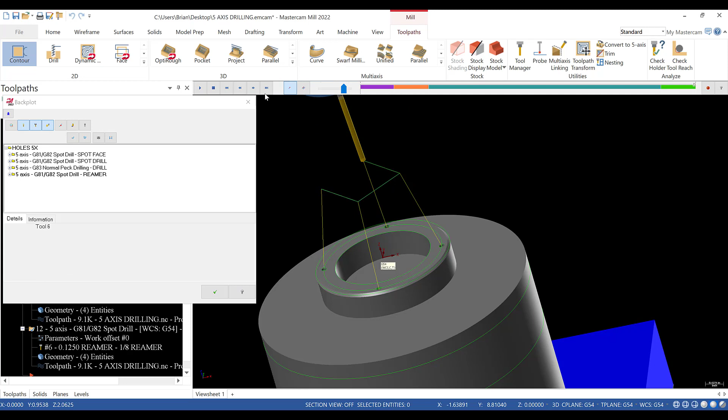And the reamer. Okay. So let's take a look at this quickly in Verify. We'll go to Simulation. And I do need to position this workpiece down 2 inches onto the table. I'm not going to worry about that for right now, but I covered that in another video, so we'll just watch this run.

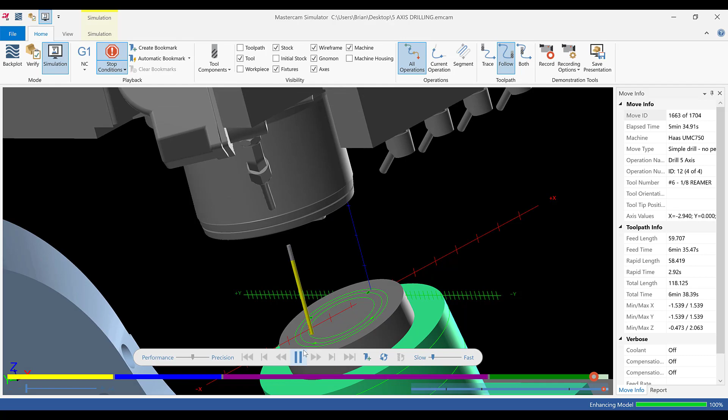There's the drill op. And finally the reamer. Okay, so get out of here. Let's take a look at this code.

Okay, so I do like the X-30s in G53 and Y0 whenever there's rotation, so that's good. You don't know where you're going to be in the beginning. The UMC brings it up 2 inches above the 0 in G53. That looks good. Unlocks the table. Make sure B is at 0, all set. Tool 3 is there. Tool 4 is going to be next in the carousel. Spindle's on. C0, B13. Lock the table.

Dynamic work offset. Position. Z position. Okay. X goes back again. It's just kind of a duplicate code. We get back into here. We get into our drilling operation, feed of 14. Okay. G94 is the inches per minute mode. So we're good there. Cancel canned cycle, come up, rotate to C90 at feed of 500. Again, the B is not moving because the B is already locked at 13 degrees. Drill. Everything looks okay. I'm not seeing anything sticking out.

The nice thing is when you cancel DWO, cancel your tool height, it goes to Z 2.0 from home, X minus 30. That's excellent. But notice it does not go to B0. That's good, okay? Because we're going to be staying there anyway. There's no reason to go to B0, okay?

So let's look at the other lines of code here. We're going here, G254, load up that. All the work planes, unlock the table, rotate. This is going to C360, B13. That's fine. You'll see that it keeps rotating around. It'll keep spinning. It is not resetting the counters, and that's fine for what we're doing. It's just going to unwind at the end. And there are ways around that. There is a code, if I remember correctly, to kind of reset the 0 so you're not waiting for it to unwind. But we'll live with it for this one.

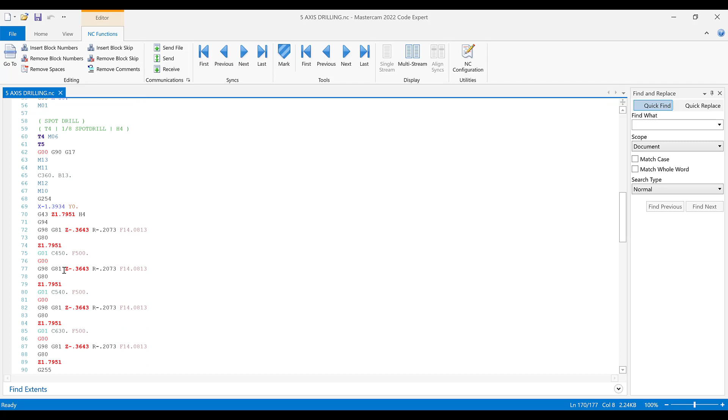Okay. Everything looks okay. 540, 630. 500s are good for the spot drill at least. So again, the B13 tilt is okay. Inches per minute. Good. Take a look down here. I'm mainly looking at the rotations. Dynamic work offsets on. And we continue to work through the peck drill, and that's fine. 990. Minus 30. And notice again, the B13 should not be changing much. It's not re-zeroing the B. That's excellent for us.

And then again, it keeps on going through all these counters. And that's fine for us. We're not doing that many holes. If we were really spinning around, I would have to set this to start from 0 again or go to C0 each time. I'm not worried about that for this workpiece. This is fine for us.

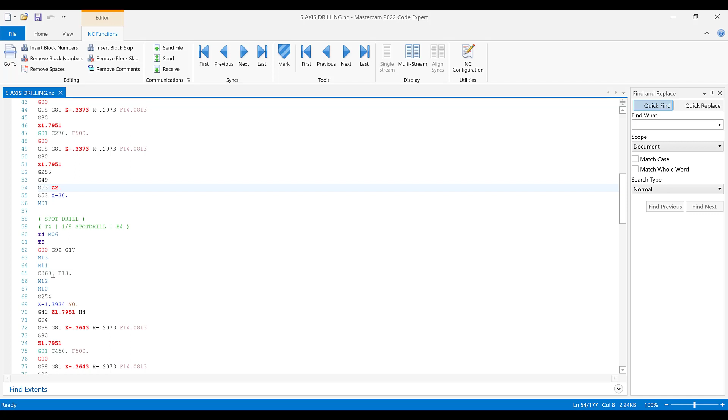And again, that does depend on your post processor. This particular post I'm using is newer. So if you're using an older UMC post, or your post is configured a certain way, then it might go to B0 at the end, or it might go back to C0 here. It all depends on how your post is set up. Okay, so it looks good. I don't see anything sticking out here that is a red flag. So X out of here.

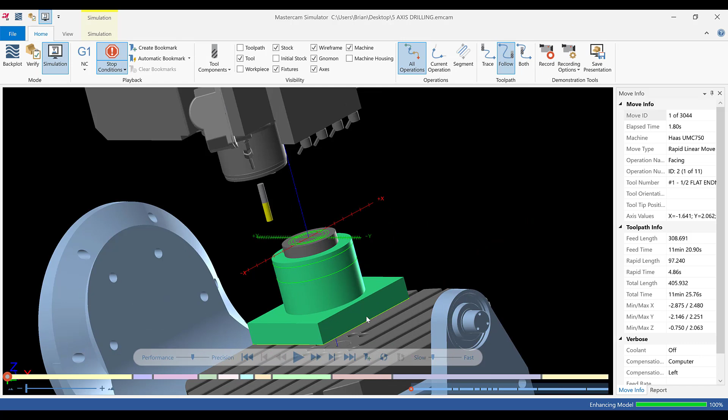Let's watch this whole thing run. So I selected everything. Get into verify. Go to simulation. And again, I have not positioned the fixture down at the table. I'm not going to worry about it for now. We'll be okay without that. So we'll watch this run. Facing up. Rough it out. Rough the inside. Finish the outside. Finish the inside. Chamfer the outside. Should have chamfered the inside too very quickly. It did. Take care of all the drilled holes. All right, and that's it. There's our workpiece. So that's about it for this one.

Again, watch your post processor. Make sure you use the one that I supply. That'll definitely help out. I'll leave it up to you on what you want to do for the next op. Again, we're going to have material hanging down here after this, the material we're hanging on to. A couple options. You can wire this if you want. If you want wire experience, it'll help to get you out of the 5-axis so somebody else could use it.

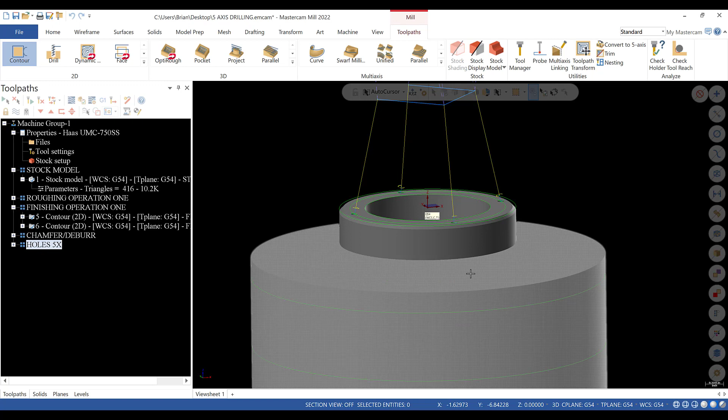The other option is just flip it quick, grab it in the 3-jaw, make sure it's sitting somewhat true, and face it to size real quick while you're there. Or you can make soft jaws, or use another 3-jaw chuck on the vertical milling machine. In theory, you could even go on the lathe if there's enough to hang on to. So there's multiple ways to do that. I'll leave that up to you. The main goal of this was to show you how to drill holes using the UMC, kicking at angles. If you have any questions, let me know, and hopefully this was interesting.